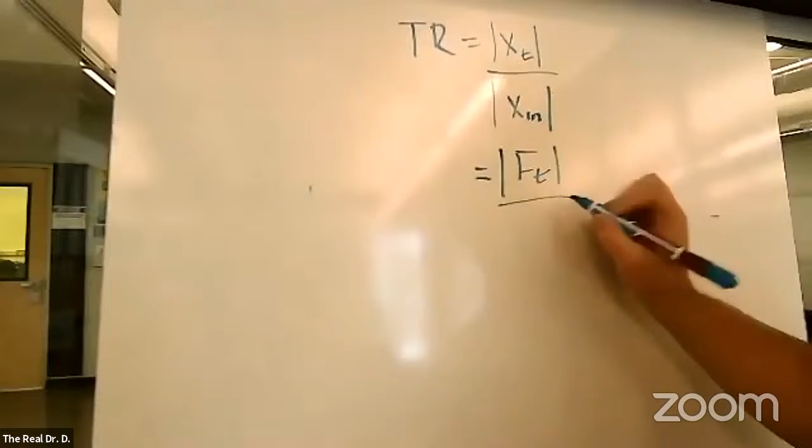So transmissibility is the measure by which we can tell how much vibration is either amplified or attenuated in our system. We came up with the big equation for it, but really transmissibility can be talked about in two fundamental ways: one is the transmission of a displacement through a system, and the other is a transmission of a force through a system. We developed these equations where transmissibility is the amplitude ratio of my transmitted displacement to my input displacement. It is also equal to my transmitted force to my input force.

These are the amplitude ratios, we're talking just about the magnitude of it. It has nothing to do with the phase, it has everything to do with how much force and how much displacement we are giving it. These two numbers are equal, they have to be equal. You won't have two different transmissibilities for the same system

at the same frequency input, at the same input. It's just not going to happen. This, though, looks an awful lot like this, because that's what it is. If you can calculate the magnitude, you can calculate the transmissibility.

And so we can limit our design by knowing about transmissibility. Recently I saw a problem studying for some professional development stuff, where they give you that chart we came up with that has the transmissibility on the y-axis and beta on the x-axis. For systems that are vibrating, we need to understand this, let me try to find it and share it, because trying to draw it is a nightmare, honestly.

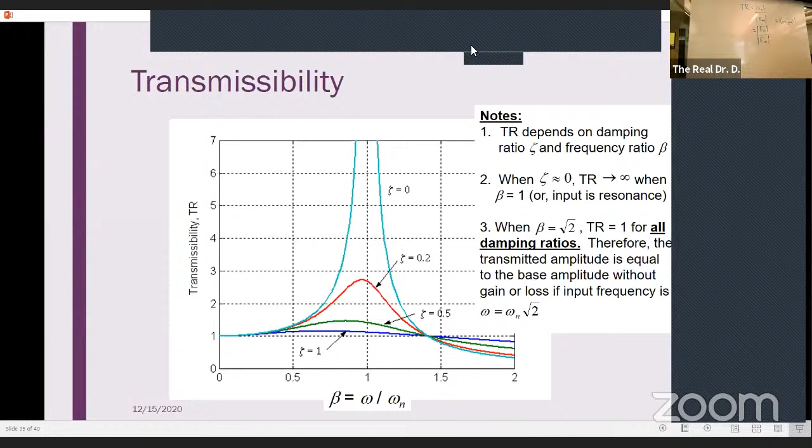So that's transmissibility. What can we do with it? We go back to the Bode diagram. We can treat it kind of like bandwidth — instead of a fixed point, you'll have a transmissibility limit. You find that transmissibility limit on your magnitude plot and go until you cross your Bode diagram. Anything that operates above that, you want to stay away from those frequencies; anything below that, you want to maintain operation.

Now in the real world, you might have to pass through your natural frequency and resonance point to get to your operating frequency. So, driving your car — the faster you go, the faster the frequency of the input from the road, directly proportional. So you want to spend the least amount of time near resonance as possible. That's the idea.

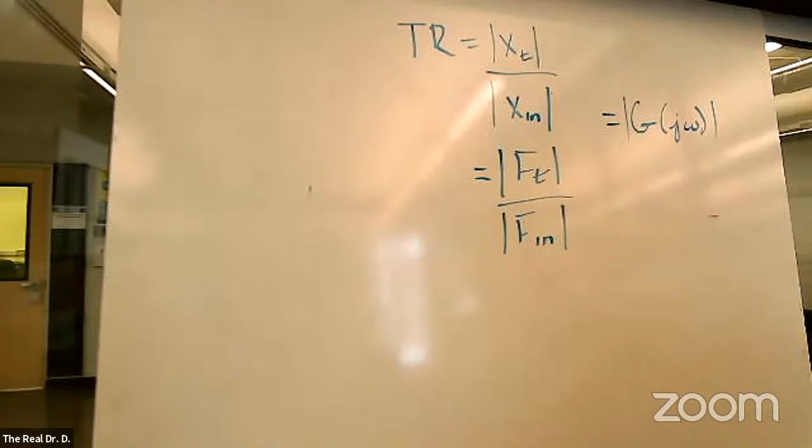That brings us up pretty much to where we stopped last time — that recaps the last few weeks. We're going to talk about rotating unbalance today. I actually saw an example of rotating unbalance on my commute to school today — somebody's hubcap wasn't appropriately centered, and it looked like it was going to pop off, with a lot of excess vibration. Do you guys have any questions on anything we just went over? Anybody doing all right?

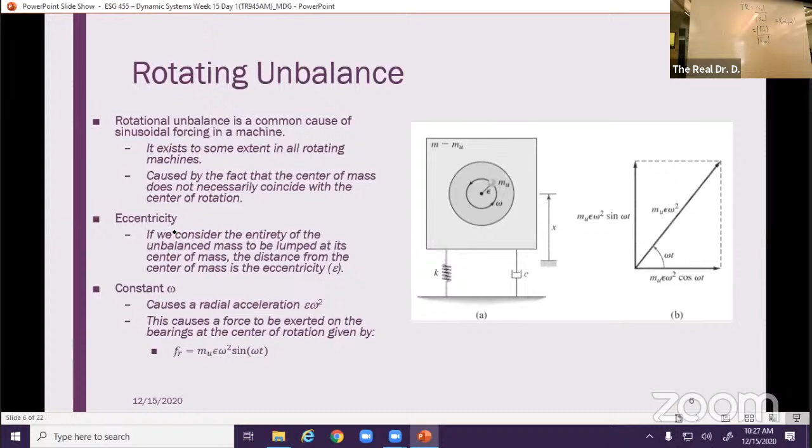So we'll go through the derivation. Remember, we're interested in two things: transmitted force or transmitted displacement. Those are typically the two things that we want to characterize.

So the definition of force transmissibility, which we talked about earlier, is the amplitude of the transmitted force divided by the amplitude of the input force. But in this case, we're going to say our input force is the bearing force, the M sub u epsilon omega squared.

And we'll use our normal standard second order equation for a mechanical system. So we can solve it, we can get the transfer function, and we pop in our sinusoidal transfer function. So substitute all of your S's for j omega. If you're still using the time domain transfer function, that's fine. All your D's become j omegas, same deal.

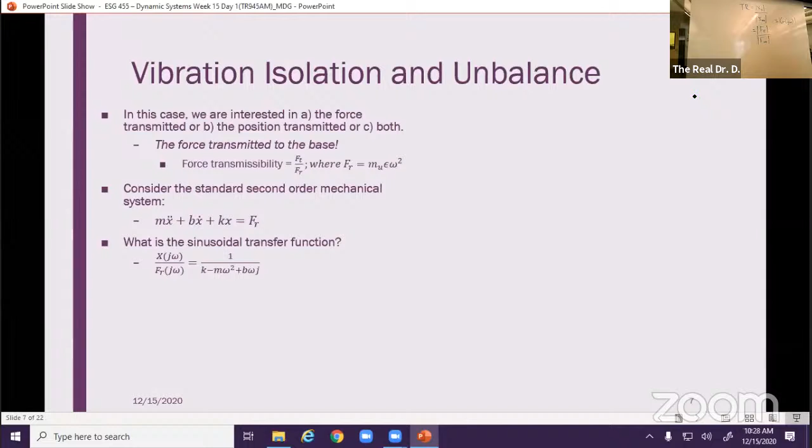Notice how this is written. This is the way that we've been talking about it. Here is the real portion, and here is the imaginary portion. Remember, if you're going to find magnitude and phase, combine your real portion first. Don't try to do it as three separate terms. You're going to have a bad day.

Look, there's our transfer function. And wouldn't you know it, we're going to find the magnitude. And if we find the magnitude, we will get this. And that equation should look kind of familiar. It kind of looks like our transmissibility equation that we developed two classes ago.

So there's our transmissibility equation. So it turns out that the magnitude of x of j omega is just the transmissibility times this ratio of my offset mass to my total mass, times epsilon, times my eccentricity.

But wait, Dr. D, you said we wanted to talk about force transmissibility, but you did all this with displacement. It's true, I did say that. How does this all play together? Well, the transmitted force is equal K plus BS times X of S.

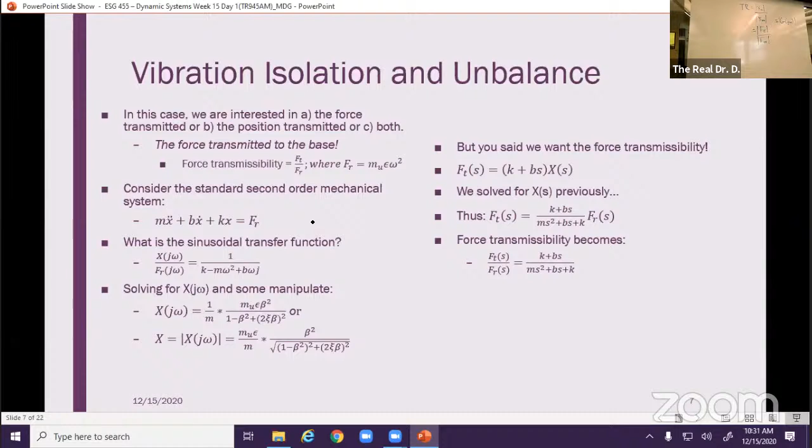And then force transmissibility, we'll just give it the old transfer function treatment. Divide out by f sub r of t, or of s, I guess. And we perform the same manipulation to get everything in terms of beta and zeta, and there it is. So you get our transmissibility, or force transmissibility, as a function of beta and zeta. Great.

So that means what? That means you need to know zeta and you need to know beta for both, and you also need to know epsilon for the positional, but not for the force transmissibility. Not for that.

Okay, thus ends topic 6, the final topic.

Do we have any questions before we launch into our case study? It's 10:30, we need to be done by 11:45, right?

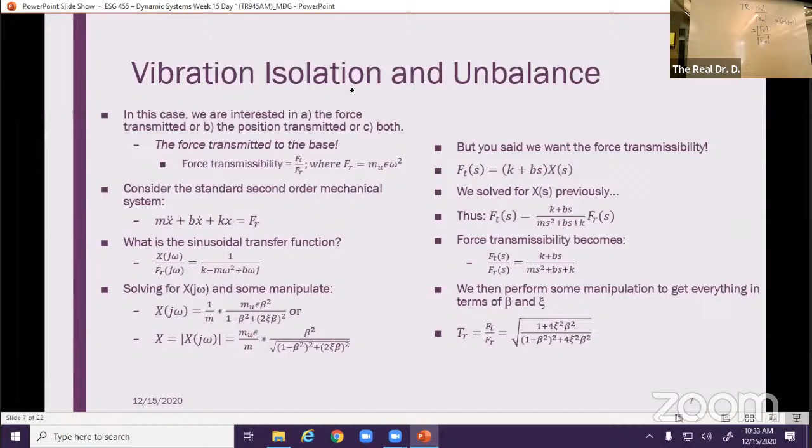No problem. All right, what do you want to talk about before we launch into the exciting world of case study? No? Okay, so here's our case study.

We're going to use a car seat. Not like a kid's car seat, but like an actual seat. For the intents and purposes of this, this is going to be the vibration isolation system seen between, or in this case, the commercial vehicle's seat.

So what do we have? We've got the vibration isolation mounts of the seat connected to the floor of the vehicle, and then we've got the seat itself, which has some vibration isolation properties, and then we're going to have the driver sitting on top.

So the seat has a mass, the driver has a mass. Each one of these has its own individual displacement. We've got some input displacement of the cabin floor. The goal is to analyze the dynamic response of the seat suspension system using the tools we've developed so far. So, first things first.

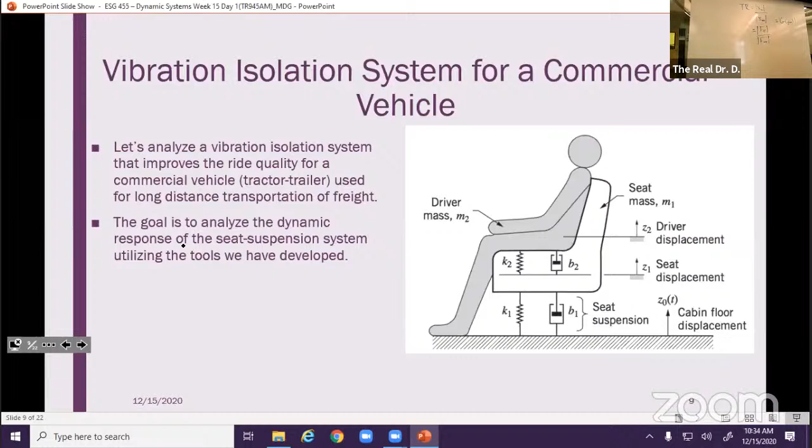We need to make a model. So if we lump all of our masses, we've got the driver mass that interfaces with the seat mass through the vibration isolation system, K2 and B2. Then we have the seat mass, which interacts with the floor through K1 and B1.

Free body diagram, so we do our inputs and outputs. We need to write our mathematical truths and reduce our equation. In this case, you can do it a couple ways depending on how you want to set up your Simulink model, because that's where we're going to end up going. But I'm going to end up doing it in state space because of the way that I set it up.

Do you need to do it in state space? No, you could create a transfer function and do it as a transfer function model. But I think from last class, we saw that dealing with a fourth order transfer function is very much fun, and we all love the algebra, but doing it as state space is a little bit cleaner.

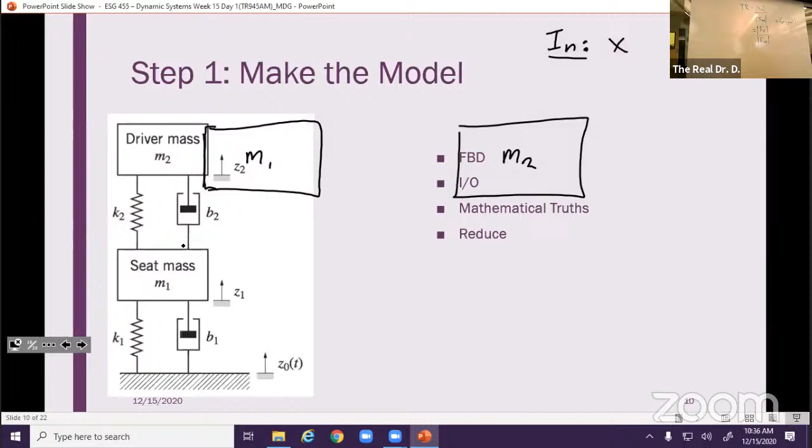Okay, so free body diagram. I'm going to say my input, just so we have it, is what we called Z0 here. Z naught of T. And my output is going to be Z1 and Z2. So I'm going to have a dual output system. I want to track both measurements here.

Do I need to do something with both of them? No, but I'm going to track both of them as the output. So that's going to affect what? That's going to affect my output equation, that's it, it's not going to affect my state equation. Right, so mass one.

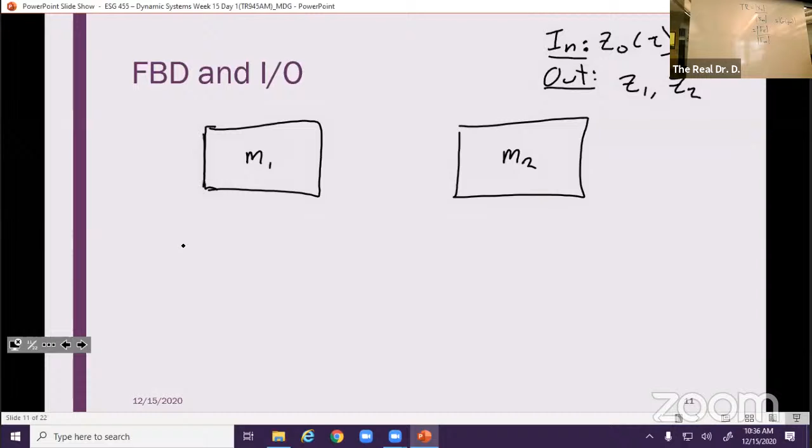So let's assume, from the bottom, we push up, and let's say that first set of springs is compressed. Then I should be seeing FB1. Sorry, I picked the wrong one, did I do that backwards? Yes, I did that backwards. There's an easy fix here, I'm just going to do this.

So we'll say that the floor is compressed, and the base also moves more, so the top's going to be compressed as well. So if we're compressed there, we'll end up with FB2.

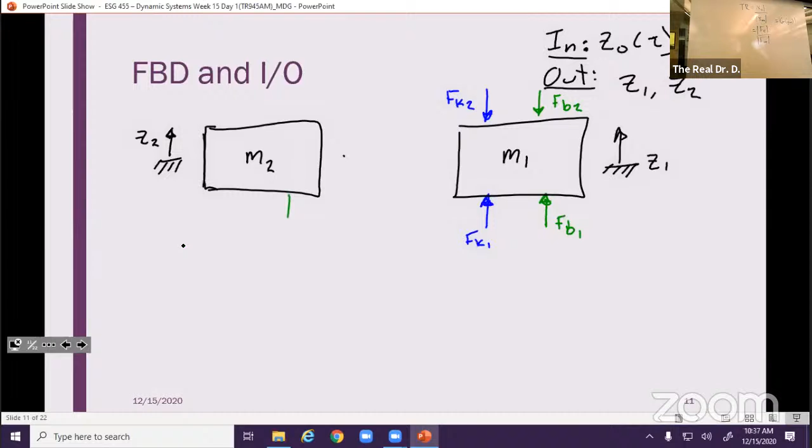There we have it. We're also assuming we start at an equilibrium point, so that the weight is taken up by the initial deflection of the spring, so it cancels itself out.

Everybody good? Are we good so far? Any questions? No, just the free body diagram.

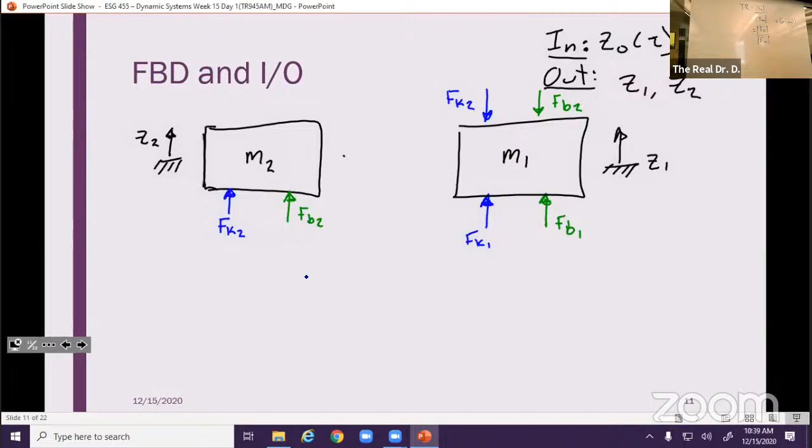All right, so since we did our FBD and our inputs and outputs, oh wrong one. We get to our mathematical truths.

And so we should have one set for each block. Sum of the forces on block 2 should be the mass of block 2 times the acceleration of block 2. Fk2 is equal to K2 times Z2 minus Z1.

Or sorry, I wrote that backwards too, Z1 minus Z2. And FB2 is B2 times Z dot 1 minus Z dot 2. Sum of the forces on block 1, Z double dot 1.

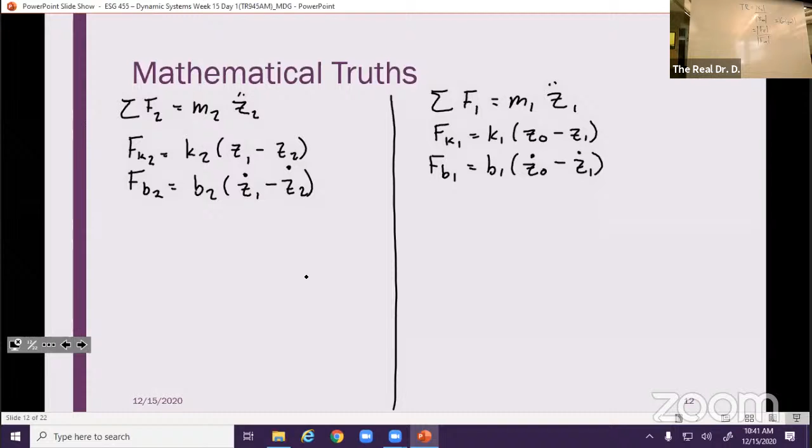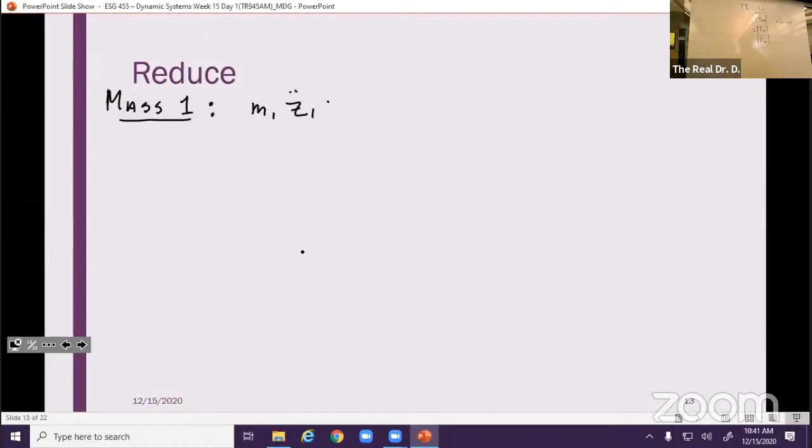So if I start with mass 1, I get M1 Z double dot 1 is equal to negative K2 Z1 plus K2 Z2 minus B2 Z dot 1 plus B2 Z dot 2 plus K1 Z naught minus K1 Z1 plus B1 Z dot naught minus B1 Z dot 1.

Right, so making this an input-output equation, which I like to do, but it's not necessary, arguably not necessary if going right to state space. It's actually beneficial to have it in terms of the double dot, but I'm going to write it out anyway just so we have it.

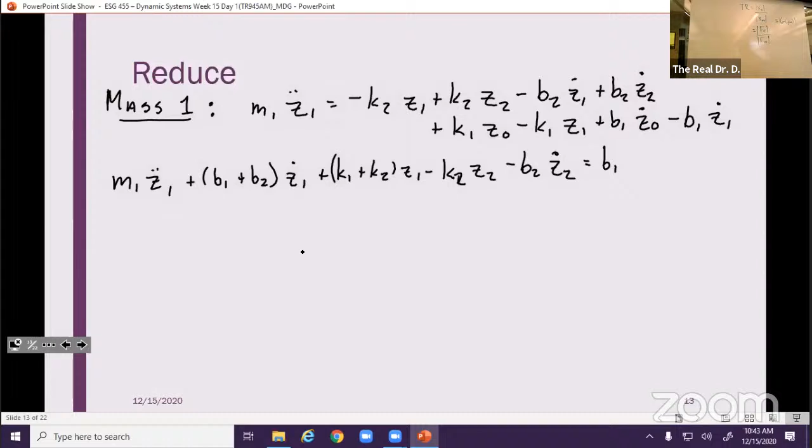Right, so we'll talk a little bit about it. The benefit of doing this in state space is, first of all, you don't have to do a combination of these two systems. So we don't have to take the Laplace transform. We don't have to then do all the algebra to combine them to get my fourth order equation. I don't have to do any of that, which is nice.

Remember though, state space is also robust to any non-zero initial conditions, which you might end up seeing in real life. And any linear combination of outputs that we want, we can find. So that's also nice.

All right, so if we reduce the second mass... let me get that. Something that looks like that, right? So we've got to set up our state variables. In this case, we already said that it's a fourth order system, so we're expecting to have four state variables.

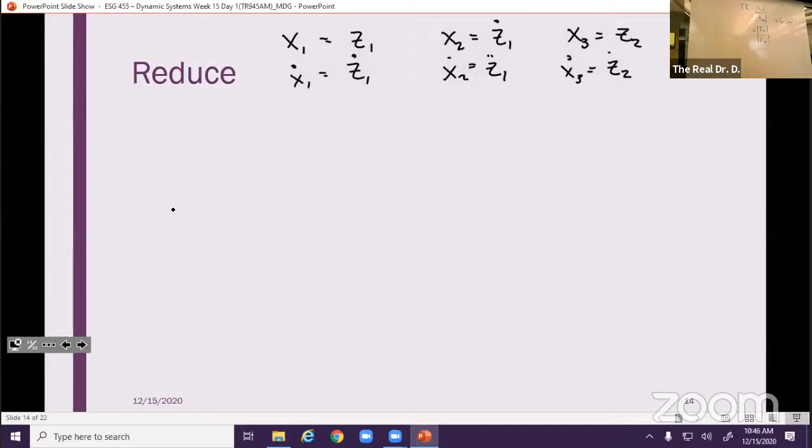My input, well, I've got two inputs actually. I've got z naught and I've got z dot naught. I have the position and the velocity are being input. I need to know both of those as my input, and we said that y1 is equal to z1, which is x1, and y2 is equal to z2, which is x3.

In reality, what would we really want to pull out of this? Just the position of the seat and the driver? We probably don't really care about the position of the seat. But what we do care about is the acceleration of the driver, right?

Why? Well, anybody, I don't think anybody here is in a crash test group for senior design. Like, Ronyo? Well, all right, so I stand corrected.

But when you're talking about crash test dummies, and crashing in general, we're talking about the rate of change that acceleration sees, or as is colloquially known, jerk. You want to know what is the rate of change in that acceleration. I had a professor once who told me that it's not the velocity that causes injury, it's sudden changes in acceleration which are harmful. It's not the fact that you're accelerating, it's that that acceleration is changing wildly and quickly. That's what's going to cause injury. That's what you really want to see here, because the last thing you want is for the seat to accelerate rapidly as it's vibrating, and you end up with compression fractures in your spine because you're rapidly compressing and extending your spinal column.

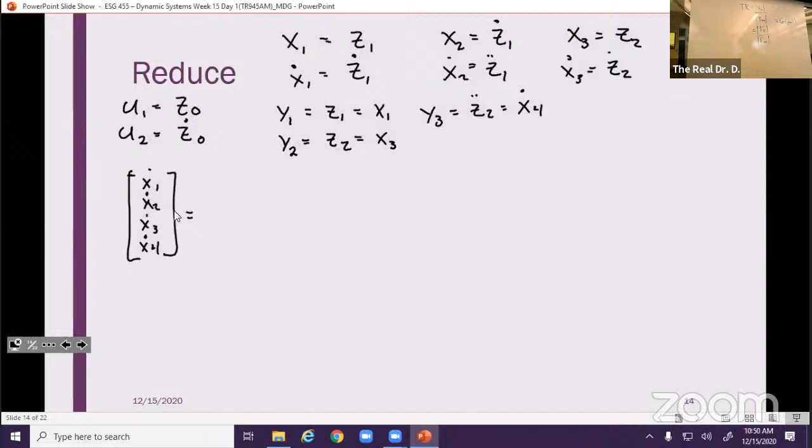Well, in this case... just setting it up. I've got this. I hope I gave myself enough room.

All right, so first off, x dot 1 is equal to x2, right? Because x dot 1 is z dot 1, and that's equal to x2, which is also z dot 1. So 1, 0, 0, 0, or 0, 1, 0, 0.

I'm actually going to give myself a little bit more room to fill this out.

That's negative quantity K1 plus K2 over M, negative B1 plus B2 over M, K2 over M. This should be M1, by the way, sorry. K2 over M1 and B2 over M1. I realize that is scrunched up and not nice looking. I apologize, did not estimate appropriately.

Remember, the equation is X dot is equal to AX plus BU, right? X dot 3 is equal to X4. And then we get this.

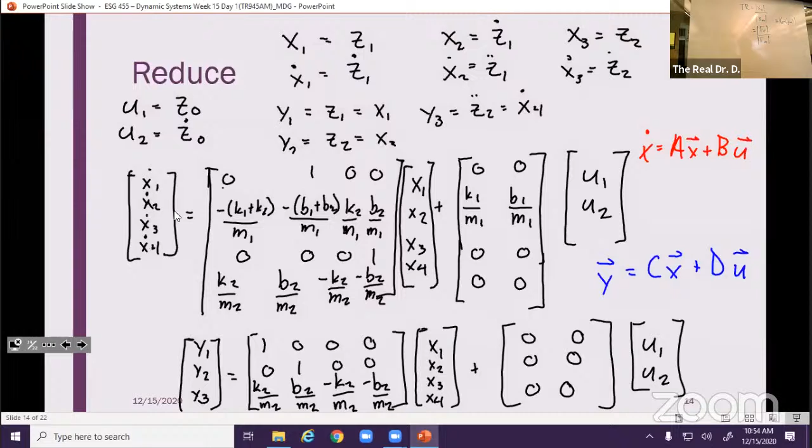Y2 was equal to Z2, which is equal to X2. And Y3 was equal to X dot 4, which is just the same as the final row in our previous equation. And there we are. Still don't have any parameters, but that's okay, we don't need them yet. This is A, this is B, this is C, and that's D, right?

Yeah Sean, just confused about the X1, X2, X3. So remember, it's Y is equal to CX plus DU, right? X and U don't change. X is just my state variable, or my state vector. In this case, I've got X1, X2, X3, and X4. Gotcha.

Keep my eye on the clock, so I make sure we have enough time for you guys to run through your points. Okay. Everybody good? We got any questions right now? Everybody, we cool?

Because remember, we're gonna have to go into MATLAB with A, B, C, and D, right? That's what we want, that's what we're gonna get. We have to, obviously, need some parameters to make this happen. And ask and you shall receive. Here are the parameters.

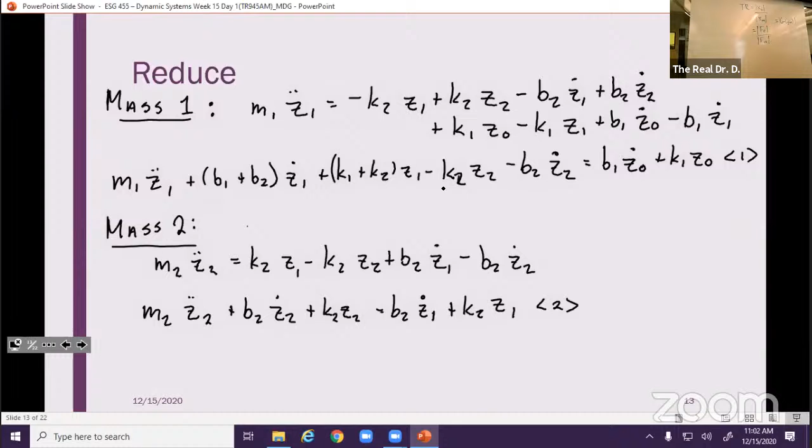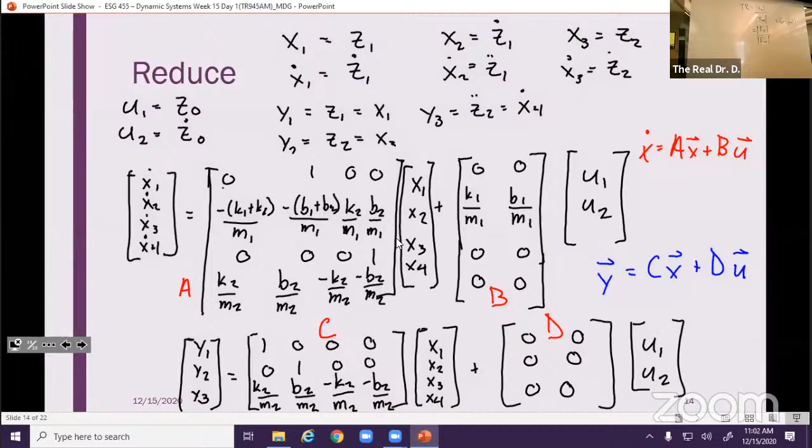So essentially, in my opinion, the easy way is to do it in your calculator, solve it equal to 0. If you don't have that option, the next way is to create the characteristic equation for each half of your system and solve for the roots, because we all know how to get second order roots - it's the quadratic formula.

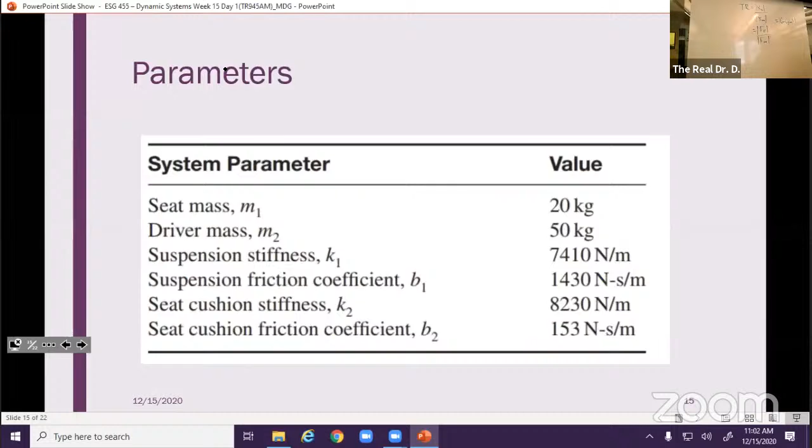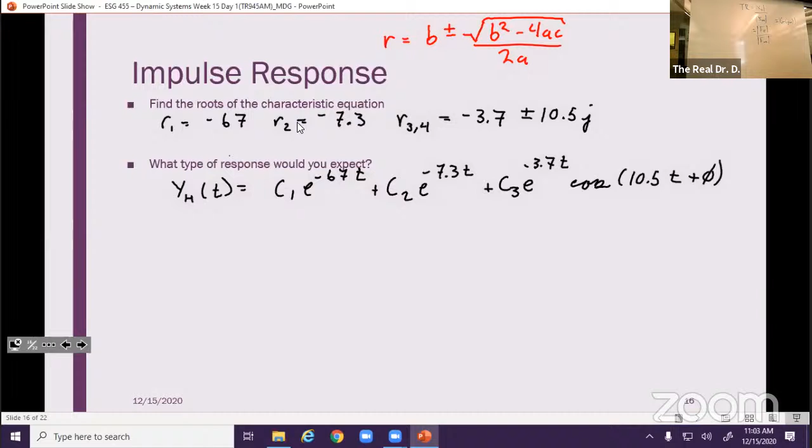Based on that, here's another question: what is the dominant time constant? Is that the dominant time constant? Yes, it's 1 over 3.7, because it's the slowest one. Remember, the time constant - each one of these has a time constant, it's however long it takes for e to the negative 1, which signifies that our transient response has decayed to 36.8%.

So we can find the dominant time constant. We can say that tau is equal to 1 over 3.7, which gives us a settling time of approximately 1 second - like 4 times tau, 4 over 3.7, around 1 second.

Why do we care? Because this will be dominated by that damped sinusoid response, right? So that's what we're expecting to be most prevalent. Yes, there will be fast changes accompanying it. There's going to be some initial transient dynamics that maybe don't look second order in nature, but overall this system should look like a second order underdamped system when we look at the output. That's what we would expect.

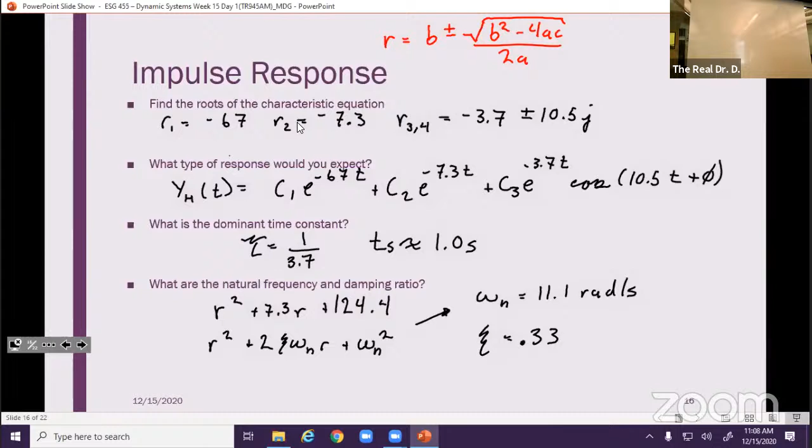So now we do the Simulink model. We're talking about the impulse response. And typically in the past, how we've created an impulse has been we essentially game the step function, because there's no real impulse generator in Simulink, at least that I like to use. So we typically just use our step function. We have it either start at a certain level and turn off after a very short amount of time, or you combine, you add a couple of them together, whatever you have to do.

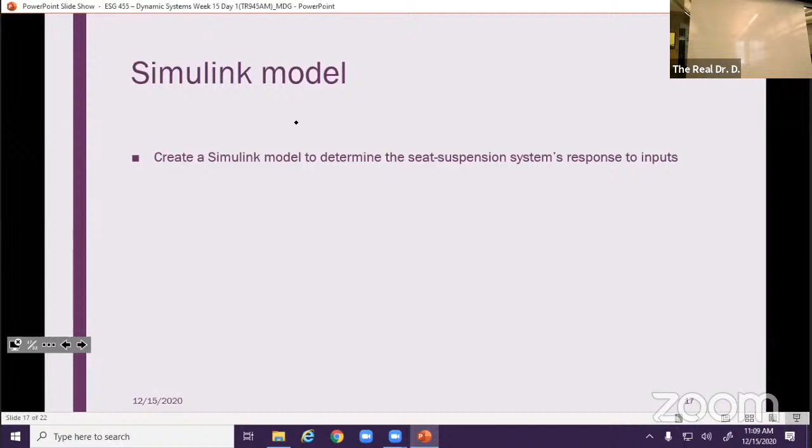In this case, we need to generate our impulse, but instead of doing that, we're going to assume that our vehicle hits a bump that causes the sudden displacement of the cabin. Speed bump, pothole, whatever it happens to be, we hit it. We have sudden displacement, assuming we don't catch air—assuming it's not like a Dukes of Hazzard situation, we should be all right.

So how do we model this? Sure, you could do that impulse that we've been doing, but is that the most accurate way of us actually modeling an impulse? It's not really. So what we're going to do is talk about a triangular pulse. It's going to ramp up with some forced ramp up—when you hit this speed bump, you have a certain amount of force, and that increases until we hit the top of the bump, and then it decreases on the way down. This happens over a very short amount of time.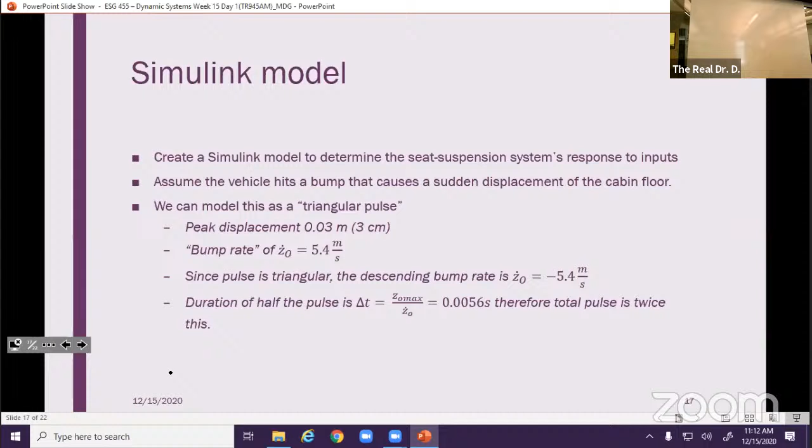All right, so here's my seat triangle pulse code. You can see I have all my parameters entered. I've got my A, B, C, and D matrices. I've got my initial conditions set as 0. I have my triangular pulse set up just the way we talked about. I've got the end time for my simulation as 3 seconds.

I'm gonna hit the bump, and then that's gonna be it. And so we're going to talk about, and I've got my Simulink model here, seat triangle pulse.

Let me show you guys what that one looks like. Okay, so here is the seat triangle pulse model. You can see I've got the bump rate. So this is just on this left-hand side, this is just me making my triangle pulse. That's all it is. And I add those three components together.

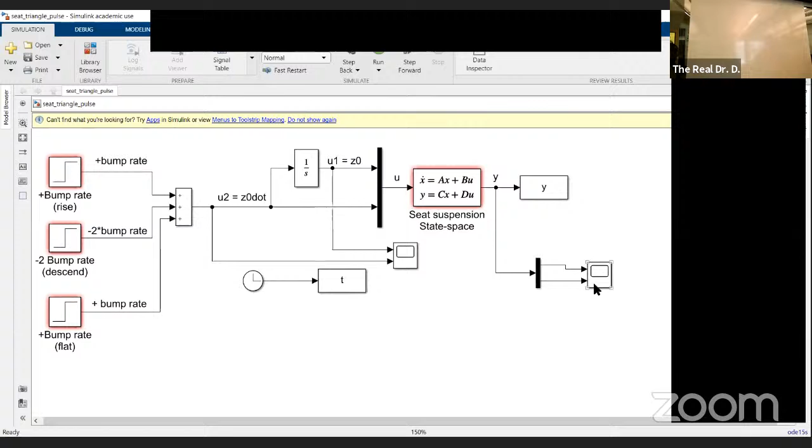And then I can plot them, which I will do using Simulink, but I also have a scope here where I've demuxed my signals. So I demux them, take the array of Y, and I split it into its output signals, and I can look at the scope there as well.

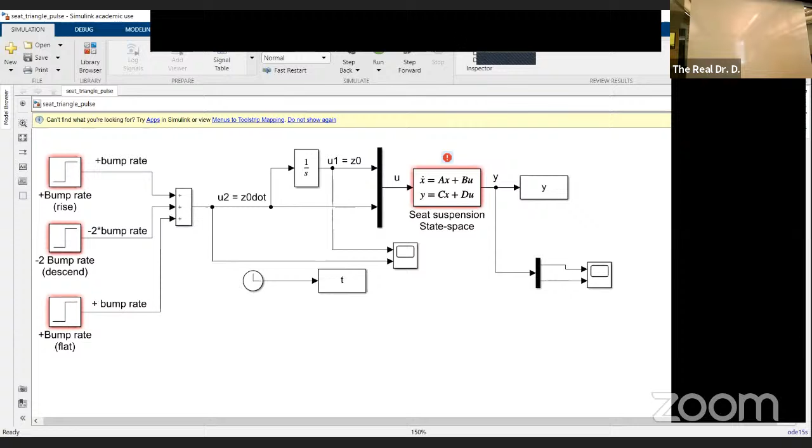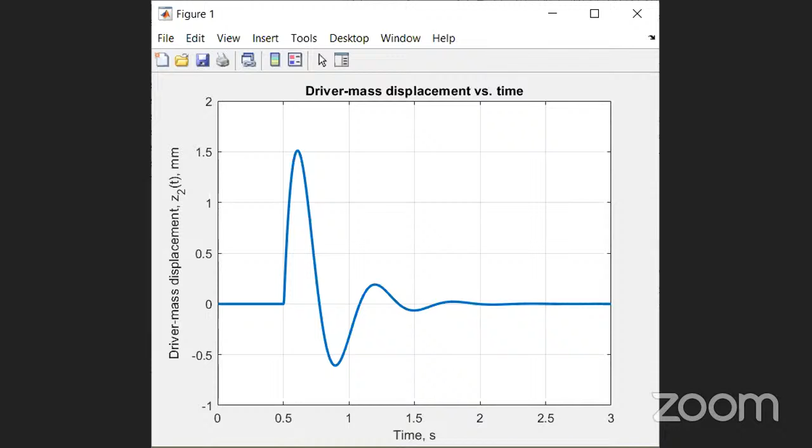So we go back, we're going to run this. That should, yeah, there you go. Okay, let's see. Uh-oh, please don't freeze, please don't freeze. All right, so what happened? This happens. Please don't freeze. Doctor, oh, there it is. Never mind. We were having technical issues for a second, but this time it worked out. I'm not so sure it will next time.

Anyway, so here's the driver mass displacement versus time. You hit the bump, so that flat portion is telling us we're driving along. Remember, there was that flat portion. The flat portion of the input was saying we're driving along, it's flat for this long. Then we hit the bump, it goes up, comes down, and this is what we get out of it. So think about your experiences driving over speed bumps at high speeds, which you shouldn't do, but it happens. You feel yourself go up and then come down into the seat, and then come up and...

So when I was working at BioRec, there was this accident I was working on. It was a low speed accident. Somebody had rear-ended somebody else and had a dash cam. It was a taxi driver, most taxis nowadays have dash cams. And there was an accident. He rear-ended somebody at a turnoff, and he wasn't wearing a seatbelt. And that looked way more violent than it actually was, given the speed that he was actually driving. But again, forward, back, up and down, and then you settle out.

All right, what about the acceleration? Because that was something that we wanted to look at as well. So notice, we're only getting 1.5 millimeters, tops. We go into the seat about 0.5 millimeter. So not very much travel at all.

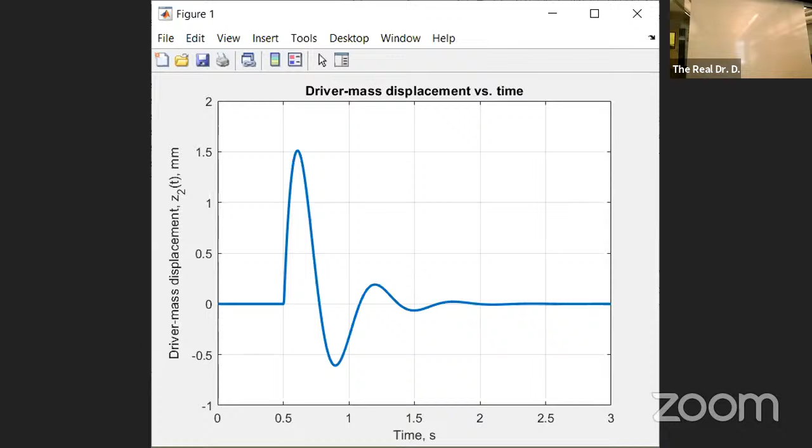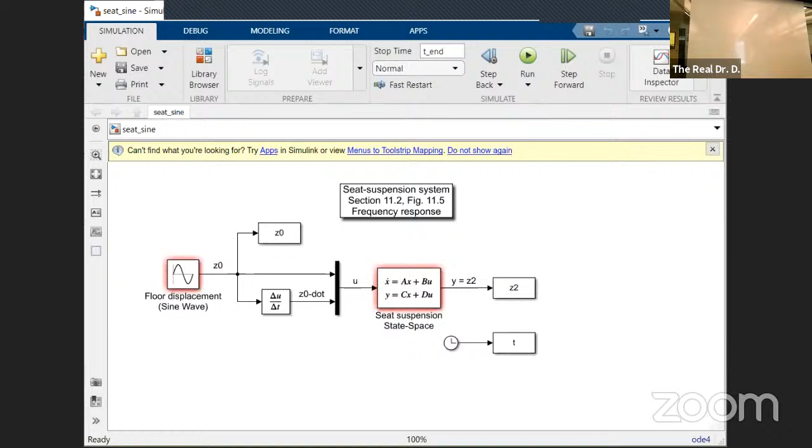So let's go back, and we'll run this one. Let's see what happens. These are the standard parameters that we've been running. You can see it's very easy for us to change them if we want to, but for right now we'll run them as is.

Wait for it. Oh, input the frequency. What do you guys want to run it at? How many hertz? 144? Okay, 144 hertz. How long? Well, 10 seconds.

I predicted nothing noticeable in the... What's the amplitude? Good question, what's the amplitude? It's 20 millimeters.

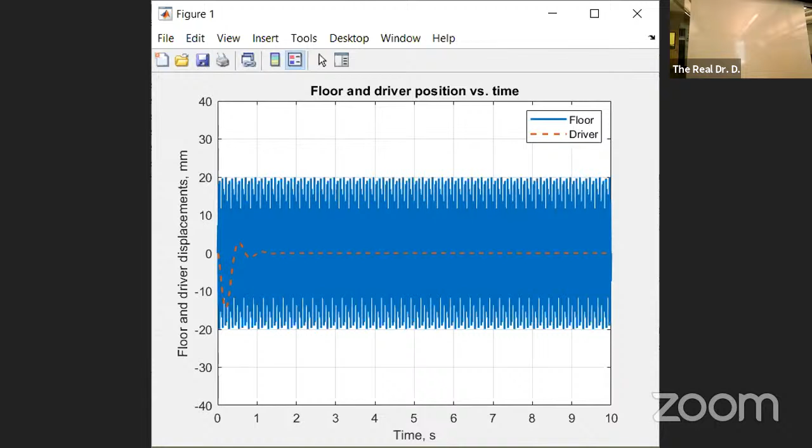So it overlaid everything, but the dashed line there - so what is this showing us? At lower frequencies, we attenuate less vibration. At higher frequencies, we attenuate more vibration. That was at about 3 hertz, I did use 2.7 as Danny suggested. But you can see, if we were to do a Bode diagram of this, we would expect that we would have some flat low frequency asymptote that's around 0 dB to start with. It will likely spike up and then come down and start to attenuate.

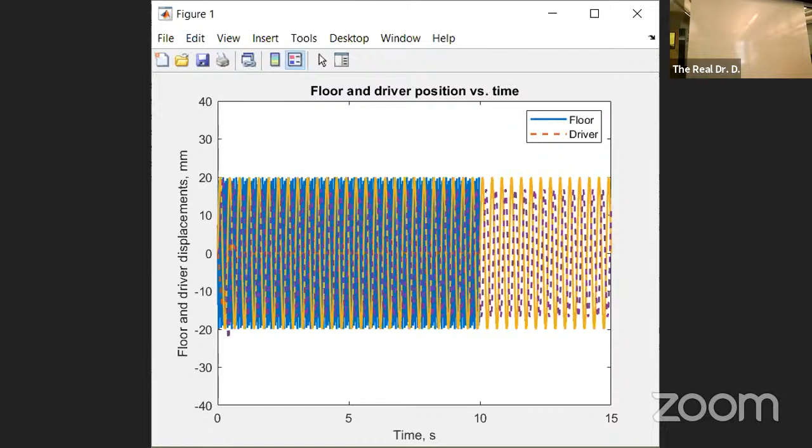Okay, and then there's one last thing that we can talk about, and then I'll be done. It doesn't leave much time for questions, I apologize. But this is my transmissibility code.

So you can see there's a bunch of different things. We can adjust all the K values if we want here, but it's the same model. Notice I'm only using y is equal to z2 is equal to x3. So I want the driver displacement. And this is going to plot my transmissibility versus my input frequency.

So essentially it's going to give us a Bode diagram, hopefully. So let's run it, let's run it and see. No, so it's still asking me for a frequency for the last one, I guess I hit run more than once. That's fine, let me close it. Sorry, I didn't close any of my plots, and so it's doing super fun things. There we go.

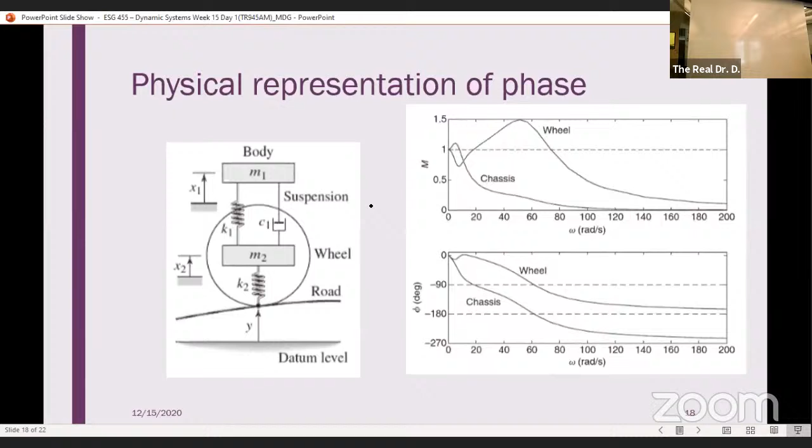So we understand magnitude, right? At a specific frequency, we understand what this is telling us. This is telling us how much vibration is being input - how much force and how much displacement is being transmitted through our system.

Phase is interesting, okay? Because what this is essentially telling you is - first, I want you to notice that both the wheel and the chassis are about 90 degrees out of phase at all times. What does that actually mean though? That means that if you were to put an upward displacement into the car, you will see a 90-degree shift in how that displacement behaves.

It will not be transmitted straight up as it goes through. What is this like? You ever drive super fast, faster than you'd be willing to admit? I don't want anybody to get in trouble, so you don't have to incriminate yourselves, but we'll assume everybody has at some point driven their car so fast that it started shaking side to side. You've input a frequency that is really, really high, and you're getting out of plane vibrational dynamics.

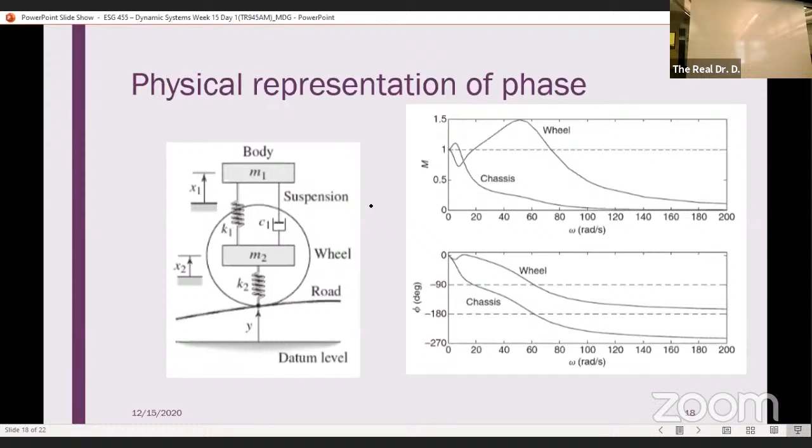That's all I've got, guys. That's it. It's the whole semester wrapped up, done, bow on it. As usual, I have had a lot of fun teaching you guys. I appreciate you guys showing up. I know this has been a strange semester with everything that has gone on with COVID, and it's just been weird. Thank you guys, and wish you all the best of luck on everything coming up.

Sean. Yeah. I guess just to be as prepared as possible for Thursday, what you should be trying to understand is transmissibility - just what you went over with the two problems. So what should you know about transmissibility?

Things that are important for you guys to know about transmissibility in the real world are: what does it mean, how does it affect your system, and how do you find it on a Bode diagram, and what does that tell you? That's basically it. Understand how damping ratio and things affect it. In the real world, if you ever come across transmissibility, that plot we showed at the beginning of class, being able to read and understand what that's telling you for various damping ratios is important.